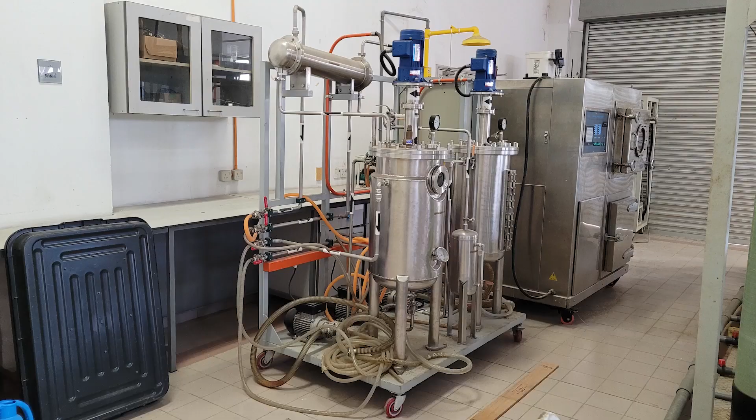This is E5 Garden. The idea is to use the center as a place for open lab exhibition. One of the candidates for the exhibition is this biodiesel reactor. The task is to plan a layout so that this reactor, along with other exhibits, can fit within the center area. The layout must fulfill 4 criteria: enclosed, secure, visible, and protected.

By enclosed, it should be able to contain all the exhibits. By secure, the enclosure should be able to be locked or unlocked on demand. By visible, the exhibit should be visible from the outside. And by protected, the exhibit should be protected from the rain or anything from above.

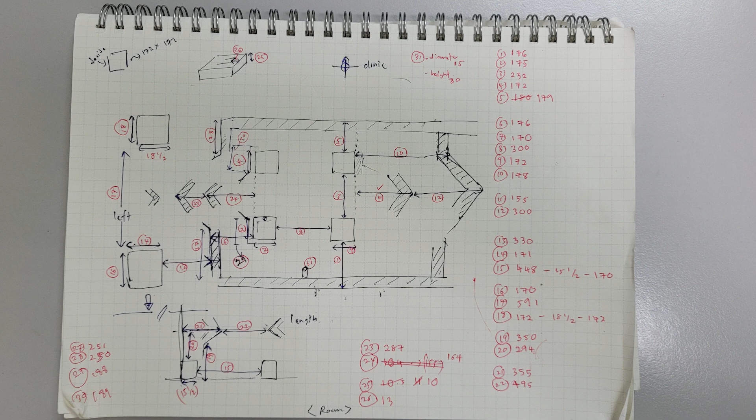Our first step is to map the area by measuring the width, length, and gap of interest. Next, we translate it into digital drawing so that we can easily and accurately design the layout. To get the sense of direction, we can add some navigation compass.

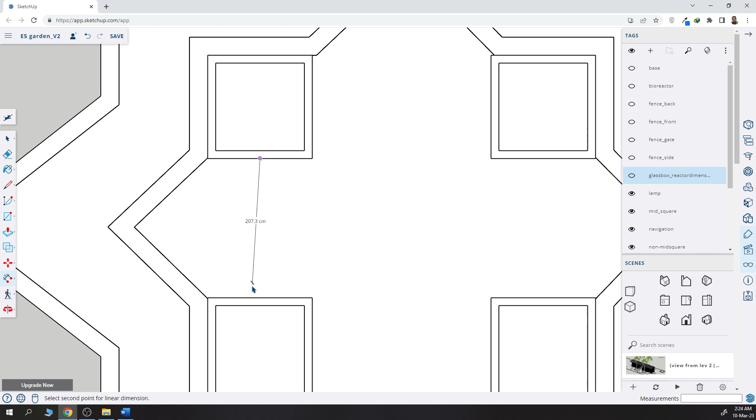Our biggest exhibit, the reactor, is about 2 meters in width, 2.25 meters in height, and 1.25 meters in depth. This dimension already includes some extra breathing space. Looking back to our drawing, the gap between these two elevated squares is 2.32 meters.

If this glass box represents our reactor with corresponding widths, heights, and depths, we can easily see that it can fit well within the elevated square. Let's fill in the glass box with the model reactor, and then we remove the glass box.

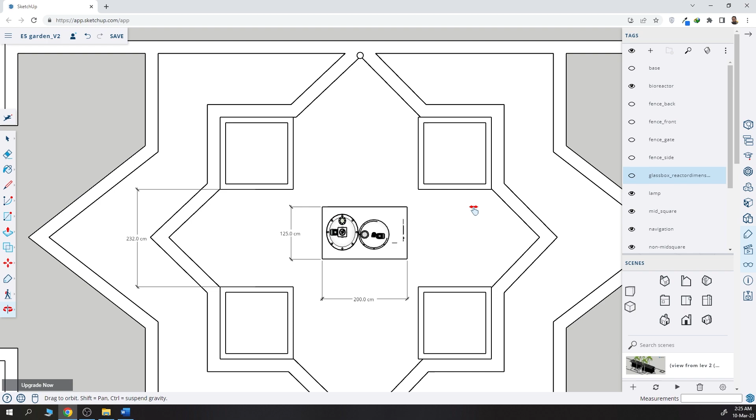As there will be more exhibits to be added aside from this reactor, we extend the enclosure up to 12 meters to maximize the usage of the center area. For the side, we go for 2 meters. For the front, we go for 5 meters, where 2 meters is reserved for the gate width. The gate is needed to allow this enclosure to be locked and unlocked on demand.

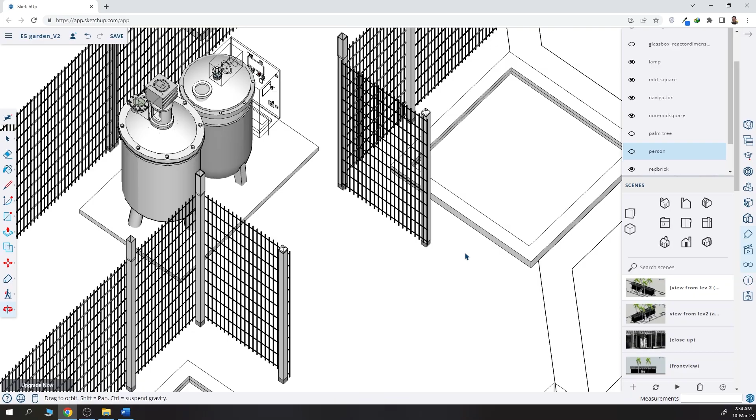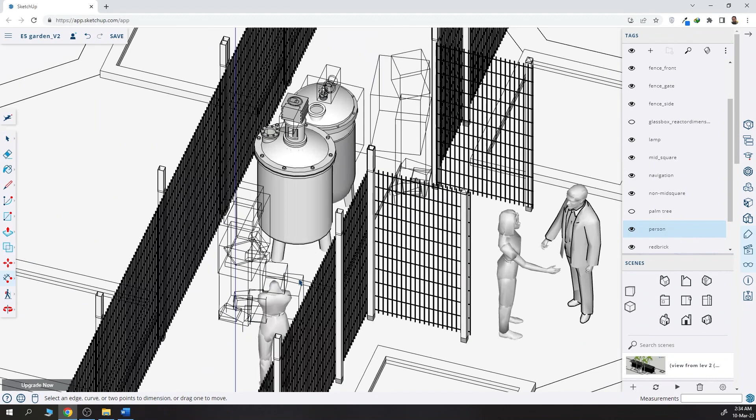We propose a simple metal fence as enclosure material, similar to the fence used to enclose the waste room nearby. The height for this fence is about 2 meters, and to give the sense of scale, we can add a model person with an average height of 160 to 170 cm. It's important to note that there should be enough breathing space for the average person to navigate within the enclosure, especially around the reactor. Now we can add the roofing.

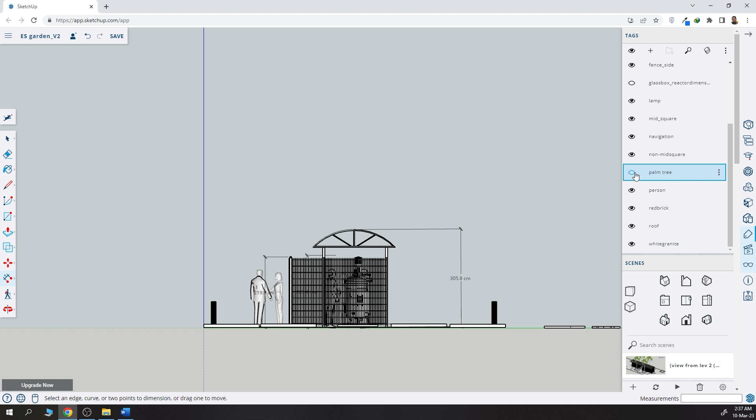The distance from rooftop to the ground is approximately 3 meters. By adding the pre-existing palm tree, we can see that the roofing does not interfere with the palm leaves. The tree height is about 7 to 8 meters, which approximates the actual tree height.